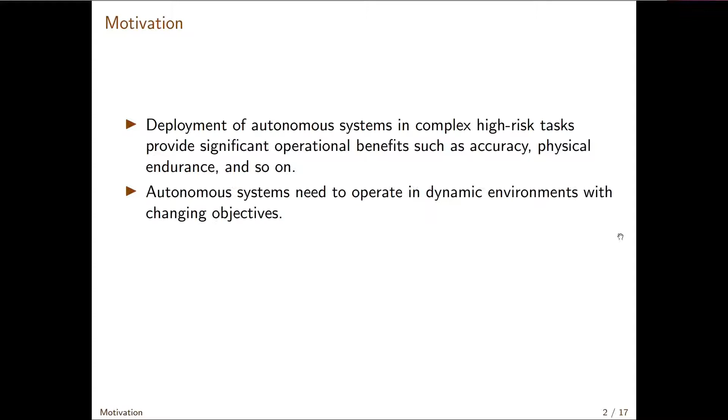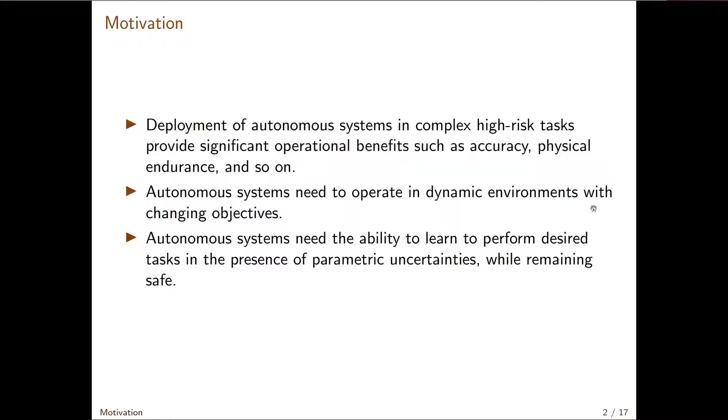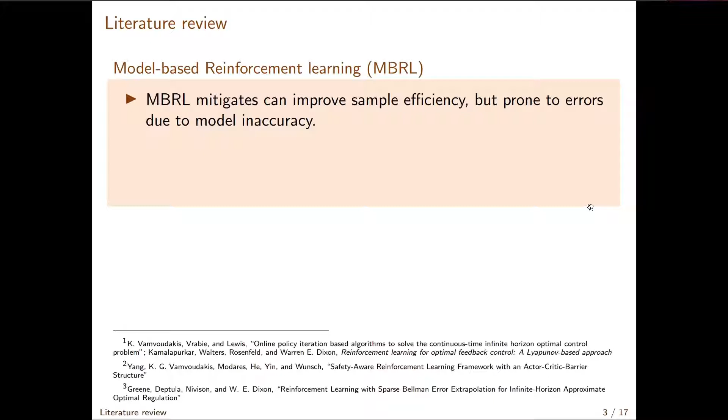Over the past few decades, reinforcement learning has been established as an effective tool for optimal control policy synthesis for both known and uncertain dynamical systems. RL typically requires a large number of iterations due to sample inefficiency. Sample efficiency in reinforcement learning can be improved using model-based reinforcement learning. However, model-based reinforcement learning methods are prone to failure due to inaccurate models.

In the past, model-based reinforcement learning techniques under the umbrella of ADP have been successfully utilized to solve reinforcement learning problems online with model uncertainty. ADP utilizes parametric methods such as neural networks to approximate the value function and the system model online. By obtaining an approximate of both the value function and the system model, a stable closed-loop adaptive control policy can be developed. In addition to the closed-loop stability, safety is also a significant consideration for online reinforcement learning problems.

Real-world optimal control applications typically include constraints on states or inputs that are critical for safety. Recently, ADP has been applied to both input and state constrained optimal control problems.

The state constrained optimal control problem was transformed using a barrier transformation into an equivalent unconstrained optimization problem. A model-based reinforcement learning approach to address the state constrained optimal control problem appeared where the results are extended to soften the restrictive persistence of excitation requirement.

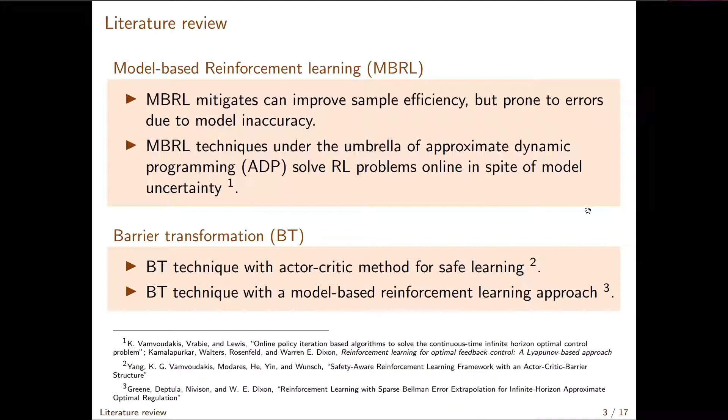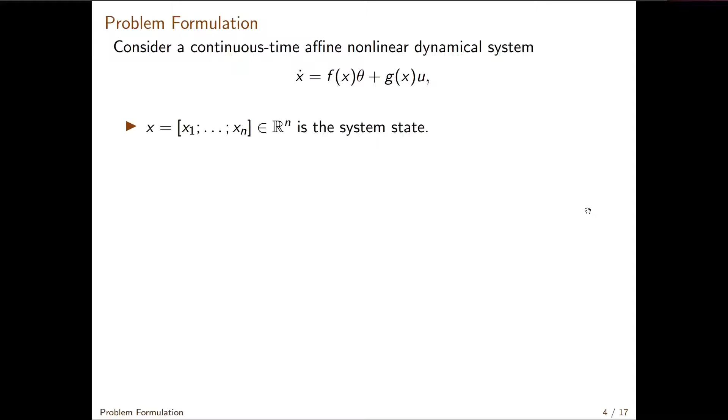Now we are going to talk about the problem formulation. Consider a continuous time affine nonlinear dynamical system x dot equal to f theta plus gu, where x is the system state, theta are the unknown parameters, u is the control input, f and g are known locally Lipschitz functions.

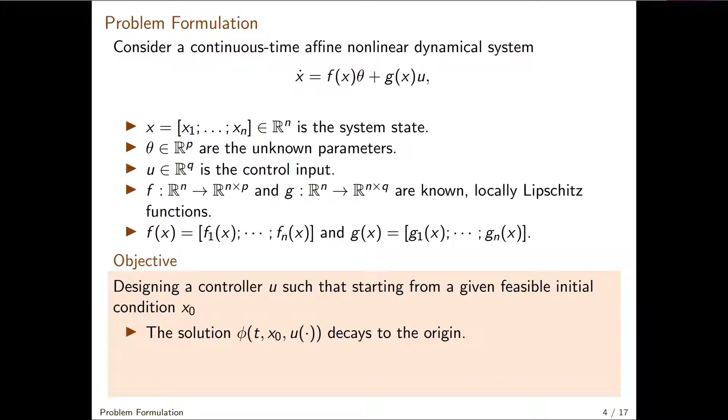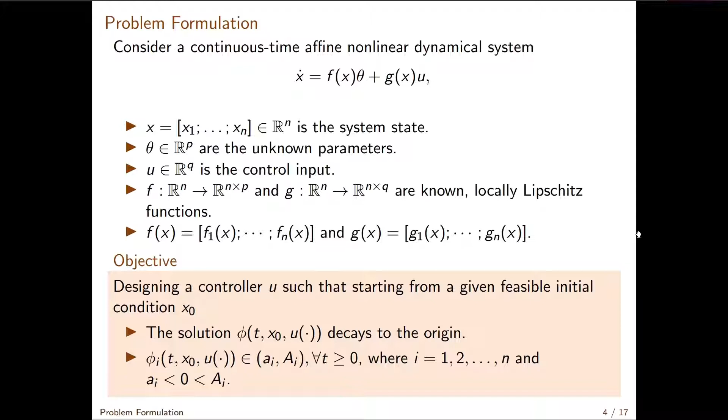Now our objective is to design a controller u such that starting from a given feasible initial condition x naught, the solution decays to the origin. The solution will always be in a user specified bound from small a to capital A.

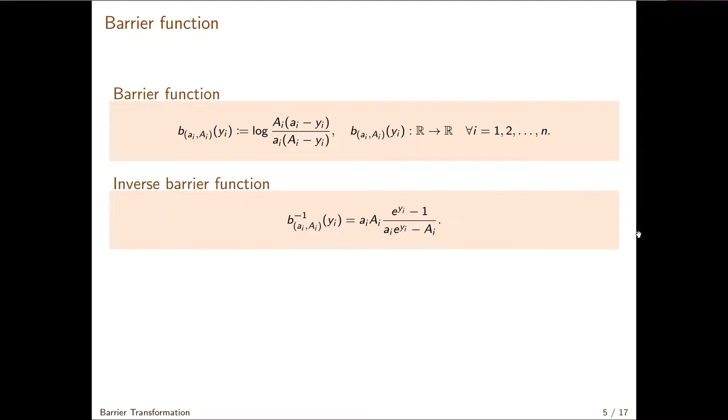Now what is the barrier transformation? These are the definitions of barrier function, inverse barrier function, and barrier transformation. Now the barrier transformation dynamics will be s dot equal to fs plus gu.

Now we have developed a lemma regarding safety. This lemma implies that if a feedback controller practically stabilizes the transformed system, then the same feedback controller applied to the original system by inverting the barrier transformation also stabilizes the original system. This lemma also implies that it will guarantee safety of the original system.

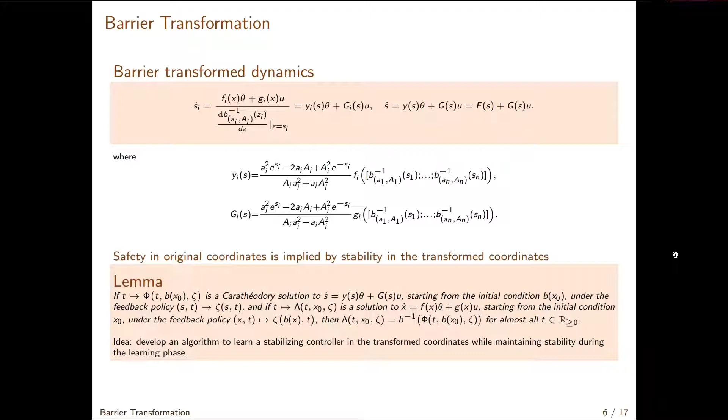Now, the objective here is to determine a controller U that minimizes the infinite horizon cost functional, where R is the combination of state penalty and control penalty.

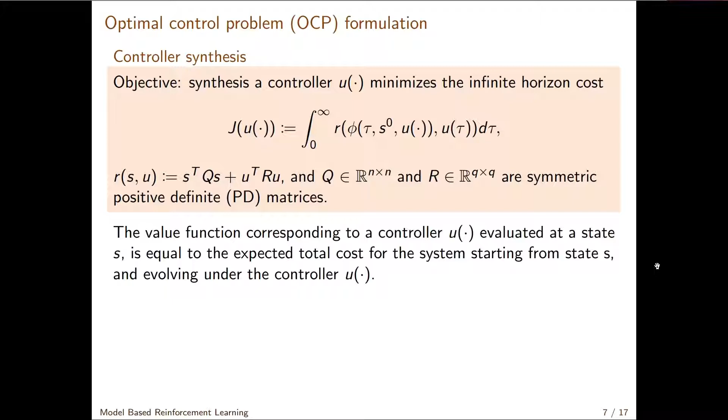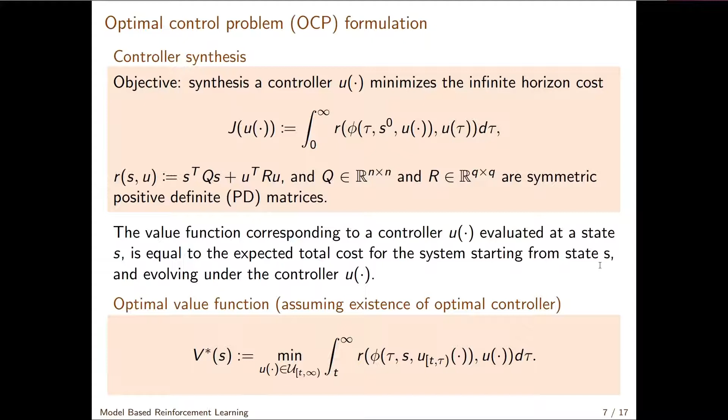One way to characterize the solution of the optimal control problem is using the value function. The optimal value function, denoted by V star here, provided the optimal control policy exists, is characterized by the corresponding HJB equation. If the value function is continuously differentiable, then it can be shown to be the unique positive definite solution of the HJB equation and provides the optimal closed loop policy.

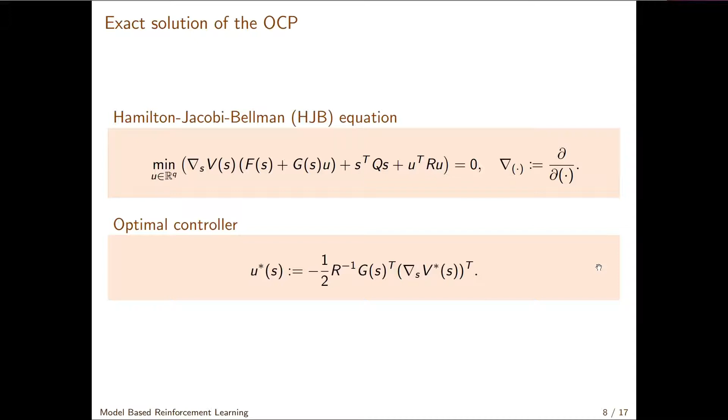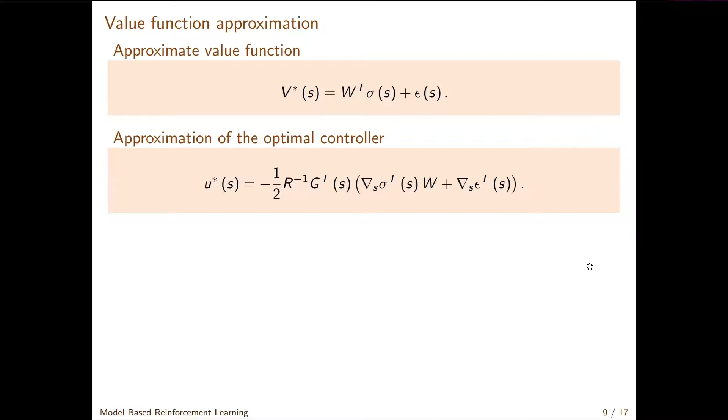Since computation of analytical solutions of the HJB equation is generally infeasible, especially for systems with uncertainty, parametric approximation methods are used to approximate the value function V star and the optimal policy U star. We have used the linear in the parameter approximation method, inspired by the universal function approximation property of single layer neural networks, in this paper.

Since the ideal weights W are unknown, an actor-critic approach is used to estimate W, where the critic weights WC and the actor weights WA are estimates of the ideal weights W.

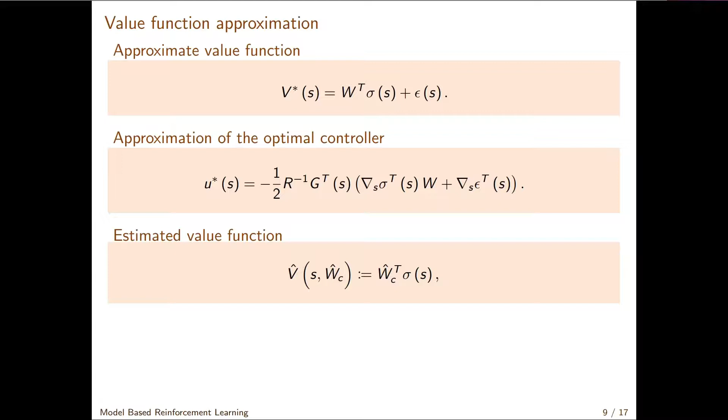Substituting the value function with the estimated value function using the critic weights, and the controller with the estimated controller using the actor weights, in the HJB equation yields the Bellman error.

Traditionally, online reinforcement learning methods required a persistence of excitation, or PE, condition to learn the approximate control policy U. Guaranteeing PE a priori and verifying PE online are both typically impossible.

However, using virtual excitation facilitated by model-based BE, or Bellman error, extrapolation, stability and convergence of online reinforcement learning can be established under a PE-like condition, which, while impossible to guarantee a priori, can be verified online.

Using the system model, a Bellman error can be evaluated at any arbitrary point in the state space. Virtual excitation can then be implemented by selecting a set of states and evaluating the Bellman error at this set of states to yield extrapolated Bellman error.

Since the Bellman error depends on the unknown parameters theta in the system model, we designed a novel parameter estimator to learn theta online.

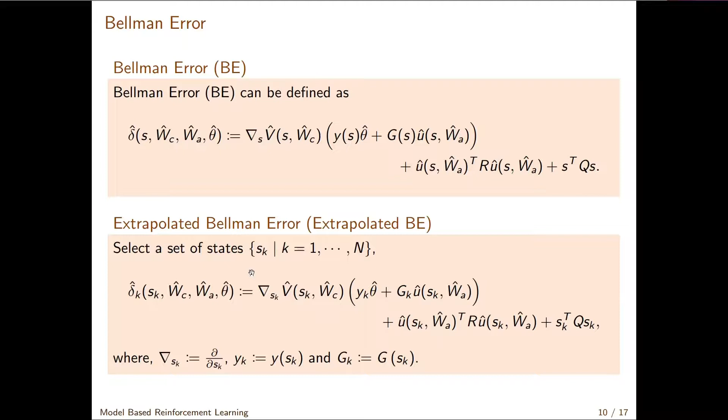Estimates of the unknown parameters theta are generated using the filter. The filter is motivated by the fact that if the matrix script Y transpose script Y is positive definite, then we can do a Lyapunov analysis to establish convergence of the parameter estimation error to the origin.

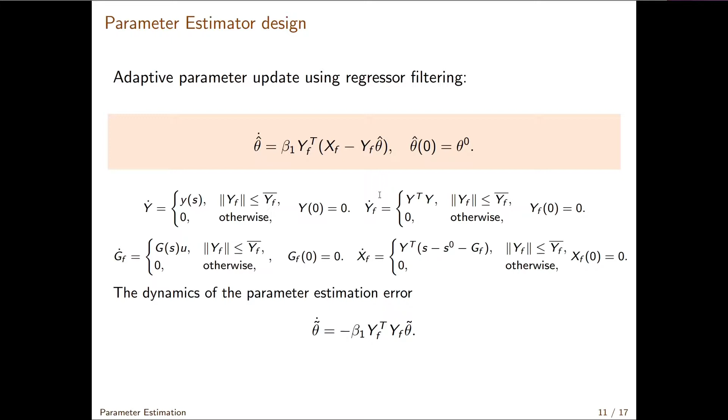Initially, script Y transpose script Y is a zero matrix. Now we need to impose a finite excitation condition, which is the assumption that there exists a time instant t greater than 0 such that script Y is full rank.

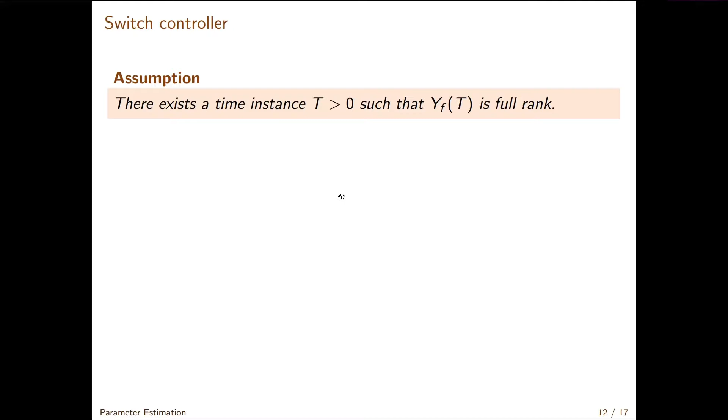Similar to other model-based reinforcement learning methods that rely on system identification, we also need this second assumption as well: if a feedback controller that satisfies the assumption is not known...

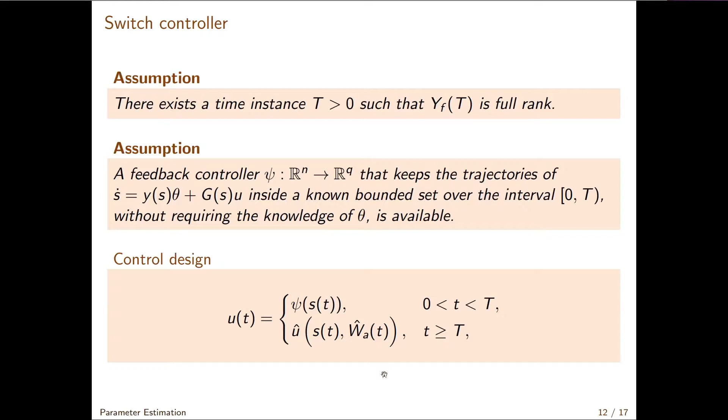Then, with the additional assumption that the state trajectories are excited over the interval 0 to t, we can also have another controller that can be learned online using model-based reinforcement learning. This is our fully developed framework.

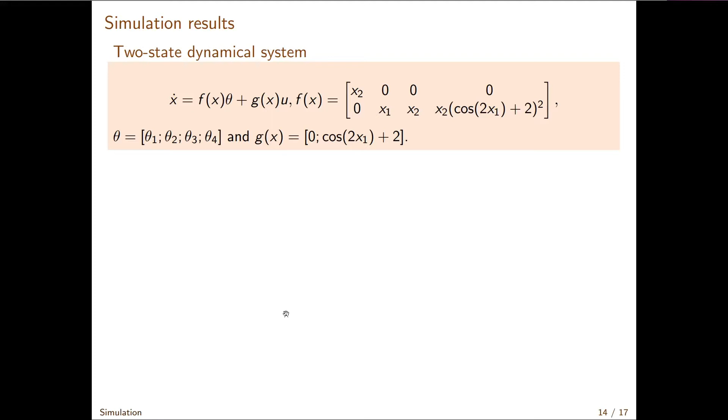In simulation, we have considered a two-state dynamical system, x dot equals f theta plus g u, with these initial conditions.

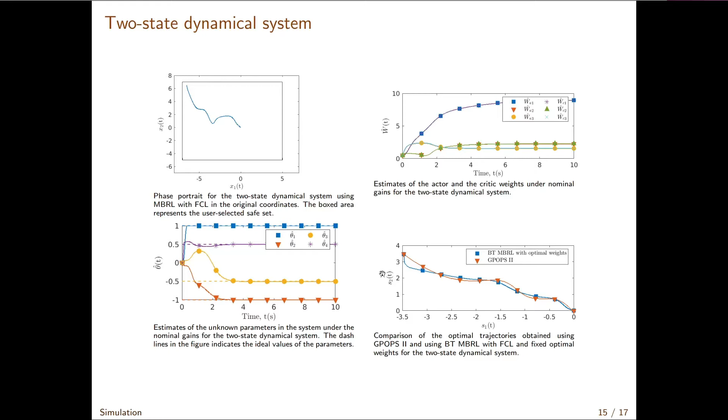The bottom left figure shows that the parameter estimation errors also converge to zero, and the bottom right figure shows a comparison between GPOPS II and our system.

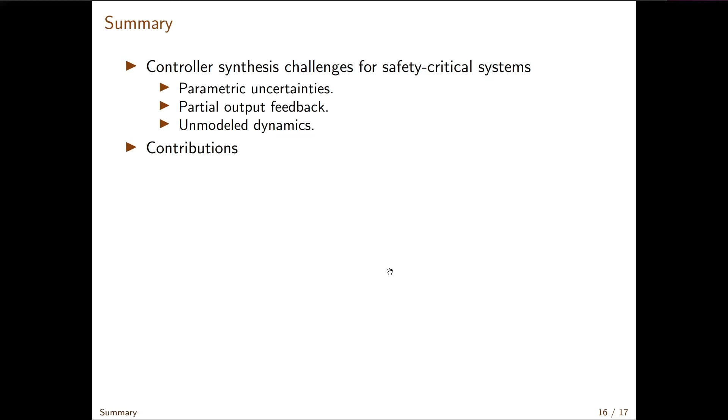In summary, the control synthesis challenges for safety critical systems are parametric uncertainty, output feedback, partial output feedback, and unmodeled dynamics. Our contribution in this paper is a novel implementation of barrier transformation in deterministic nonlinear systems with parametric uncertainty.

We present a novel filtered concurrent learning based system identification, and theoretical results to guarantee safety using barrier transformation for systems with parametric uncertainty. Limitations of our method include barrier transformation box constraints and model-based reinforcement learning.

It is almost impossible to obtain the exact basis functions. As for the safety guarantee, there is a possible violation due to unmodeled dynamics, and the stability results are local stability results.